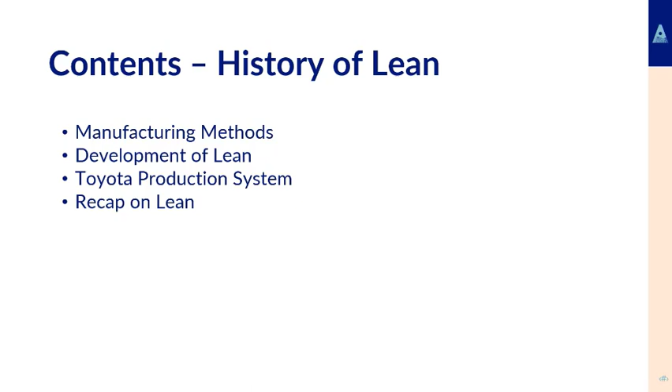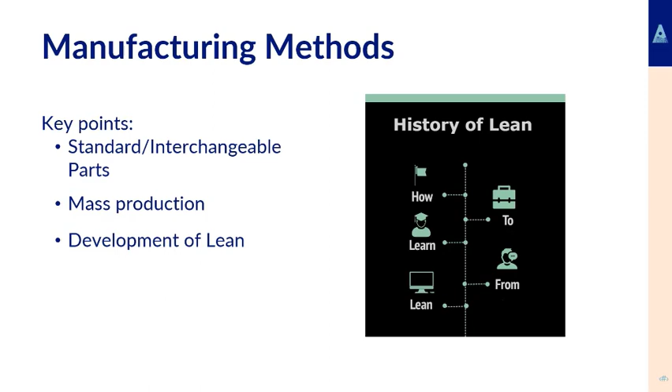This short recording will be on the history of lean. The contents of the recording will cover manufacturing methods, development of lean, Toyota production system, and a short recap. So when we're looking at the manufacturing methods, we will look at standard and interchangeable parts, mass production, and the development of lean based on these two key aspects. So, looking at manufacturing methods,

before in the 1600s and until probably mid 1800s, most items were bespoke. All parts were bespoke for different items of equipment. Eli Whitney in the late 1700s, early 1800s, an American inventor, developed the concept of standard parts. There's a short video there that you can watch that details that the original idea was coined in France, but then transferred from France to America, where Eli developed it into an actual process, and it was really about standard and interchangeable parts for developing the musket gun.

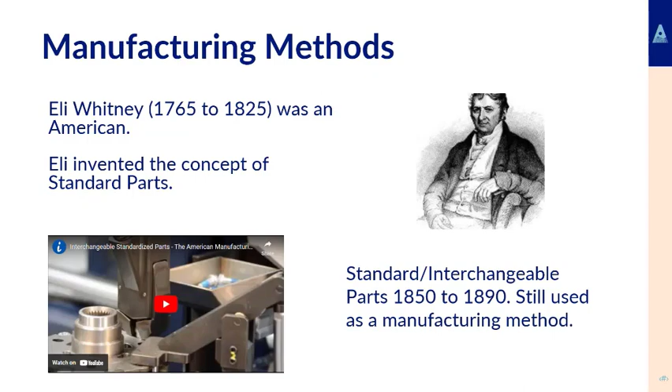If you can imagine, before that, if you had a musket that broke, and you had two other muskets that broke in different spots, you couldn't take one part from one and one part from the other and get one gun that actually worked. They were all bespoke, so there was nothing interchangeable or standard about it. So the whole concept of standard and interchangeable parts massively increased the productivity within manufacturing, and America was first to implement that, and that really put them ahead, and still has put them ahead as a major manufacturing country.

Based on that, the next method was mass production. So we had interchangeable parts, and we have mass production, and that really was building in the early 1900s when Henry Ford, the founder of the Ford Motor Company, established the assembly line and mass production for the development of the Model T car. There's a short recording up there on the right hand side that provides more detail about Henry Ford and how he developed the assembly line and came up with the idea.

But in short, Henry Ford's idea was he wanted to reduce the cost of the Model T car so more people could buy it and make it a lot more affordable. So he wanted to speed up the assembly process, make the car cheaper, sell more cars, and that itself would drive down the costs. One Achilles heel of Ford's assembly line: it worked very well, but it could not bring in customers' demands or variability or flexibility in the assembly line itself, and that was a real Achilles heel of the whole mass production system.

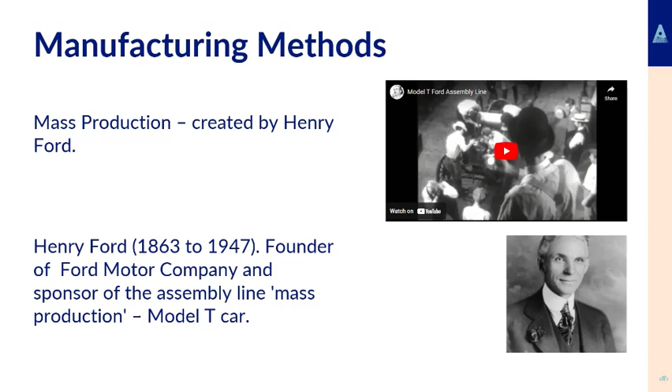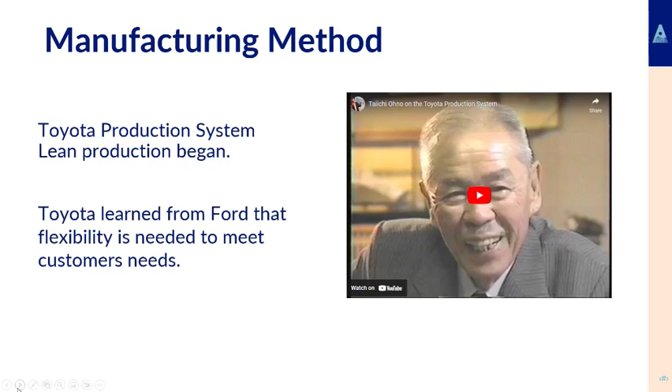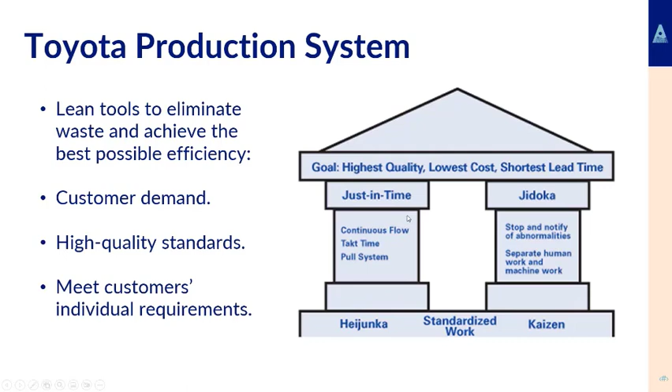The Toyota production system has a whole range of what we would call lean tools to eliminate waste and promote best practice, always with the customer at the center of it, developing high standards of work, and this process for continuous improvement. On this slide you can see a building type structure, but it all starts on standardized work. These are some key tools that we will look at in more detail during the different modules going forward.

The Machine That Changed the World is a book, but a lot of this information was supposedly very well known within the automotive industry. However, this book, a review of the automotive industry by James Womack and his co-authors, assessed a whole range of car manufacturers across the world, and detailed who was doing what, how well they were doing it, and how Europe and the Americans could get better at doing what the Japanese companies were doing.

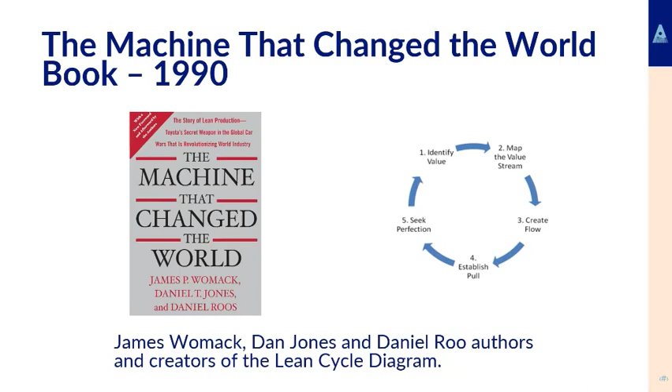And they detailed all these processes that Taiichi Ohno and the Toyota production system had developed, and published it. And other industries picked up this information and decided, that's a very good bit of information, we can try to do that in our own industry. So today Toyota is the leading lean exemplar in the world. There are hundreds of books and papers on the Toyota production system, and we're looking at it as transforming construction through lean principles, and it's all about trying to eliminate waste and add value from the customer's perspective.

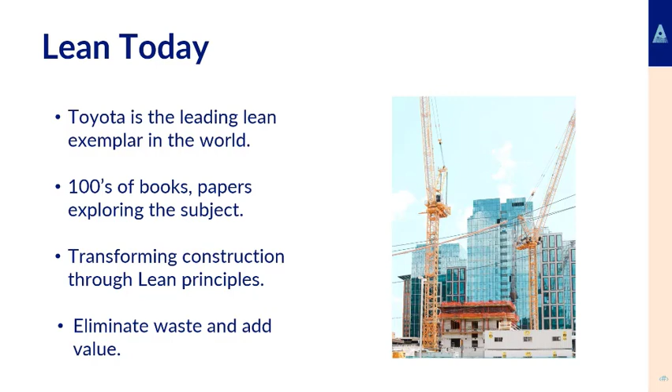Just to recap, we have bespoke parts, interchangeable parts, mass production with Henry Ford, and then the development of lean in the 1940s, and how that then, towards the late 1970s and 80s, is developing into lean construction.